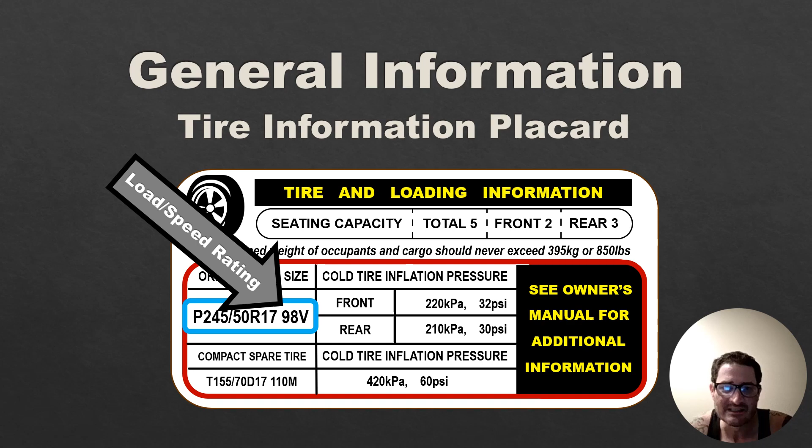Here it is. If you watched last video, this should look familiar, but this time we're going to erase some different stuff. Last video we talked about the 245, the section width, 50, the aspect ratio, and the 17, the rim diameter, so we're going to erase those. We're left with this PR98V. We're going to get rid of the P and the R for now, and we're talking about the 98 and the V. What are those things?

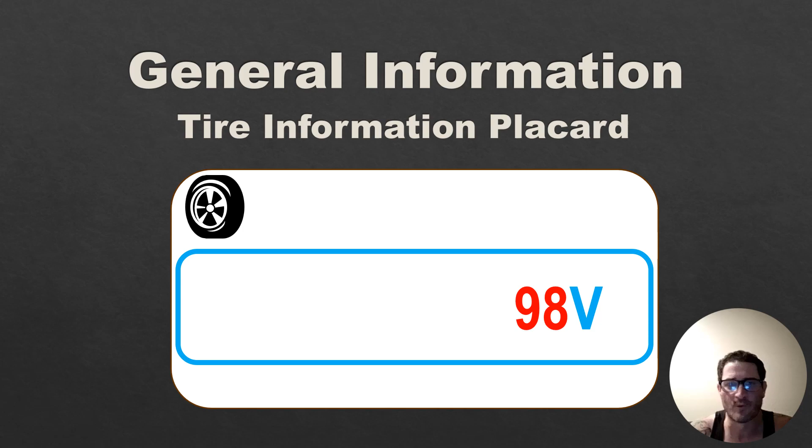The 98 stands for your load index, and the V stands for your speed rating. For all intents and purposes, the load index is your load rating. It's important not to mix these up - this is the most common problem here. When people see the 98, they think that's representative of speed, and it's not. That's your load rating, and the letter is your speed rating.

In order to find out what that load rating means, we have to look at a chart. It's called a load index because we have to cross-reference that number from the index value to a load value on a chart - it's not something we have to memorize. But here's what we do need to know: first, that a chart exists for this. Next, the higher the load index value, the higher the load capacity of the tire is - this is how much weight the tire can safely hold up.

Remember, we have 4 tires to account for the total vehicle weight. Finally, we must ensure we're installing a new tire with a load rating that's the same or better than the manufacturer's specifications. For example, I would only install a tire with a load rating of 98 or higher for this vehicle. Looking at this chart, these are only 3 values that I happened to randomly select. The chart I referenced when making this PowerPoint had 19 different values, 80 to 99.

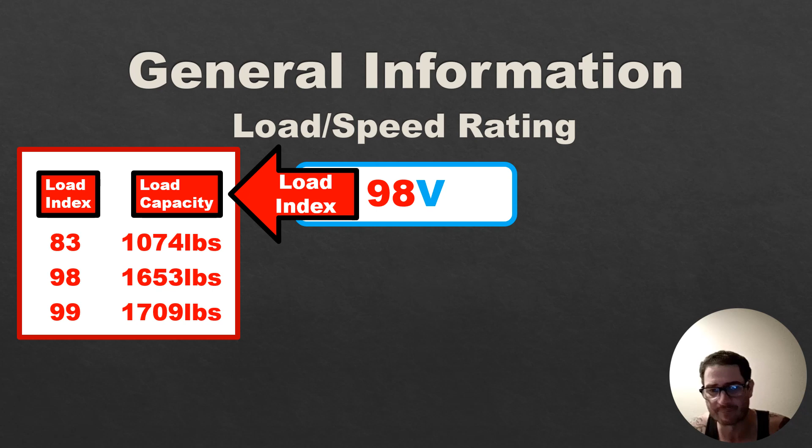As the number increases on the load index, the load capacity also increases. Now, your speed rating is a letter versus a load rating number value. Again, we've got to have a chart to reference the speed rating value to find out what that letter means.

Most of the time, as the speed symbol descends the alphabet, the tire's maximum speed rating increases. But that is not always true here - check out the H, it's out of place. It's the only one out of place, but it expresses the importance of cross-referencing the symbol with the actual value in order to make sure we're installing the proper tire.

Once we get past the letter V, we're dealing with Z-rated tires. But at the end of the day, we just need to make sure we're installing a tire on a vehicle that's the same or better than what the placard instructs. Make sense?

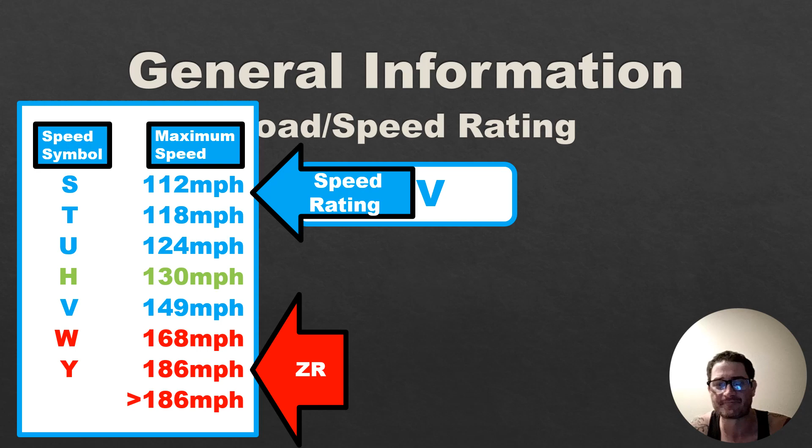Okay, back to the placard. Let's talk about tire pressure. Real quick guys, check out how we have the same size tire front and rear, but different tire pressures front and rear. This is very important.

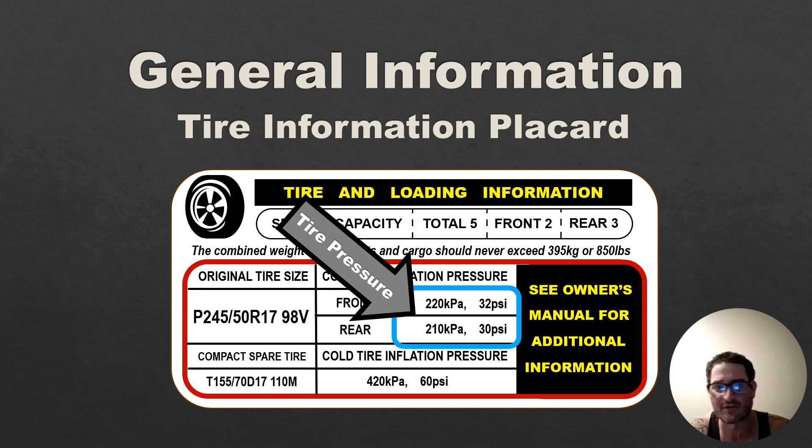It is a common mistake to try and figure out tire pressure by looking at sidewall data located on the tire itself. The tire manufacturer does not determine recommended tire pressure, that's the job for the vehicle manufacturer. The tire company does not know what vehicle the tire will be installed on when they make the tire. Ignore any data on the tire when setting tire pressure. If the values are the same, it's 100% coincidence, no ifs, ands, or buts about it. You get your information off the tire placard, and here's why.

These values come from temperature. We only have a small section of tire actually making contact with the road surface. That's prime real estate, and we want minimal tire wear, right? Of course we do. A tire that's over or underinflated will reduce our contact pattern and prematurely and unevenly wear out our tires. If you think about it, if you have a big, beefy truck, I don't care how big those tires are, if you take one tire and look at what's touching the ground, it's probably about the size of my hand. We don't want it to be half the size of my hand.

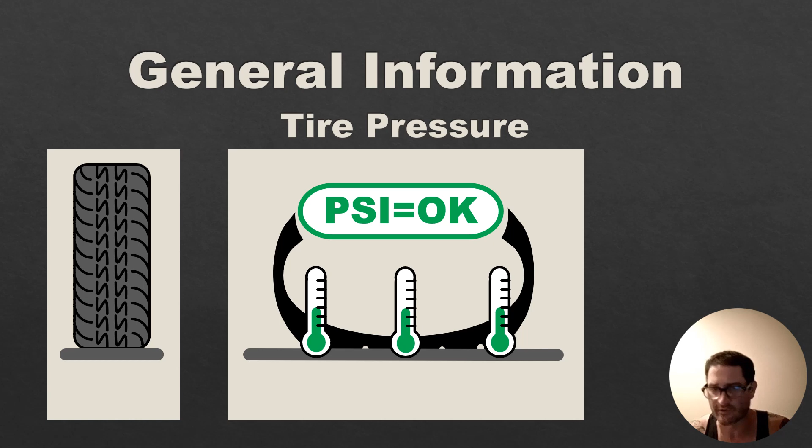Here's an example of where we want to be. When the tires are warmed up, the tread temperatures are even. The vehicle manufacturer, not the tire manufacturer, selects a tire, then tests it by inflating it, then they drive a car, and finally measure temp. If the temp's not even, the tires are not inflated properly. Think of it like they just pick a number - I don't know, 30, let's see what it does. 30 psi all around, they hit the road. Once those tires are warmed up, if the tread from the center and the edges are even, we're good to go. If they're not, we got work to do.

Here's an example of an overinflated tire. Think of a tire like a balloon. If it's overinflated, it'll balloon out, and the center is going to heat up faster than the edges, so it's going to be hotter. It's making more contact with the road surface than the edges are. If you look to the left, we're starting to wear out that center tread.

This leads to premature center tread wear, increasing stopping distance, decreased acceleration performance, as well as less responsive steering. Remember, the vehicle is only moving, steering, and stopping properly if the tires let it, and only to the extent that they do. Tires are the only part of the car touching the ground, so we want to make sure we have a great contact patch on there.

If we see this wear, it is not an alignment problem. A customer might think, hey, my tires are wearing unevenly, I need an alignment. Not if they're worn out like this. There's no wrench you can grab on an alignment rack, and there's no nut you can turn to change this. That is an overinflated tire. You need to replace the tire, and you need to have a conversation with the customer about tire pressure.

Okay, on the flip side, underinflation will wear the tires exactly the opposite way. The sidewalls will be overflexed, causing the edges to make more contact with the road surface than the center tread. When we see premature inner and outer tread wear, it's safe to assume the cause being underinflation. Make sense? It's exactly the opposite.

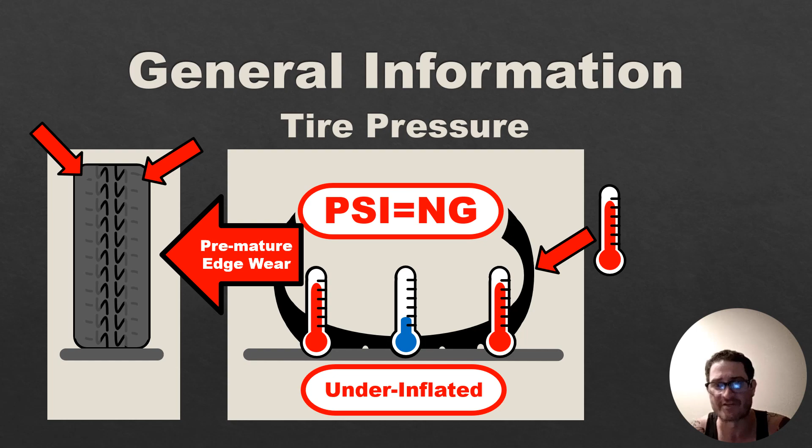Technician A says a vehicle is equipped with a P26560R16 89V tire. Technician A says the 89 represents the tire's load rating. Technician B says the tire's maximum speed rating is 89 miles per hour. Who is right? Again, we are here to find the wrong answers, not the right answers. And we are here to separate Tech A and Tech B. We're answering two true or false questions at the same time, but we don't have to do them at the same time. So let's talk about A, and we don't care about B yet. Even if B says something that's unrelated, if it's true or false, it's yes or no. If B says the sky is blue, B is right, even if it has nothing to do with tires.

Anyway, Tech A says the 89 represents the tire's load rating. Well, we see the 89, and 89 is the load rating. So before we read B, we know A is right. So we get to cross 2 off. If A is right, what do you think we can cross off? I'll give you a second. It's not neither. It can't be neither. There's another one we get to cross off, and we haven't even read B yet.

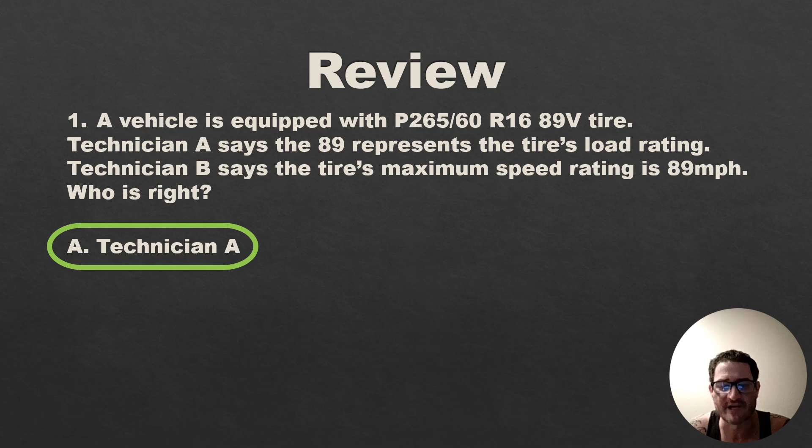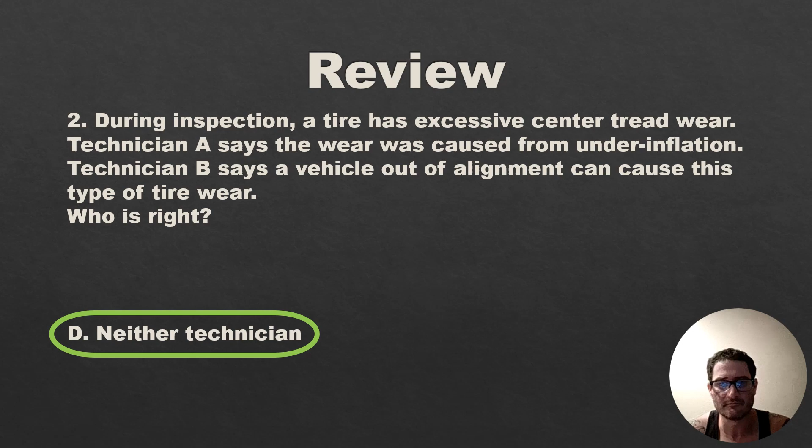All right, extra credit. What sensors are used to determine vehicle speed? We haven't talked about any of this, but I want to see what you guys say. Put it down in the comments. Number 2, going back to the question earlier, what's the tire diameter from this video's first review question? If you don't know how to do the math, watch video 1.